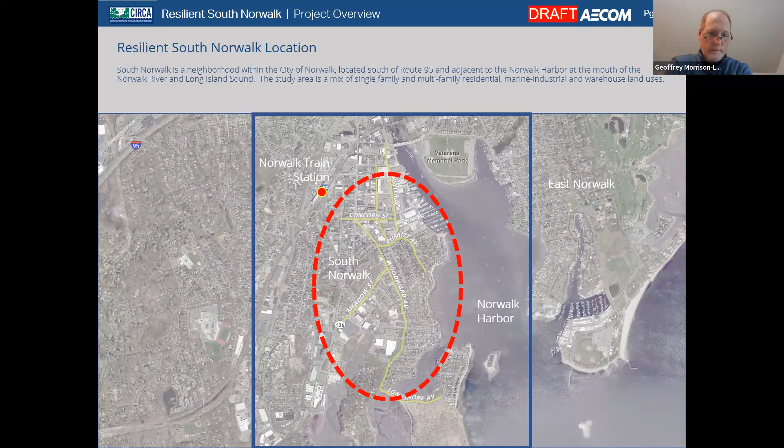In the project overview, this is one of 7 of the pilot projects for Circa, their efforts in Fairfield and New Haven counties. South Norwalk was one, and when they looked at this as a pilot project, the 2 issues that were more prominent were the flooding in this area, near Concord Street and Day Street down to Woodward Avenue, and heat.

We are looking at the project resilient design. We're really looking at resilient corridors in this particular project, but certainly other aspects of the process of analyzing resilient design are looking at community development, promoting healthy ecosystems, developing energy, economic, and social resilience, and of course, promoting flood and heat resilient infrastructure. And again, the main focus for this project was the resilient corridors.

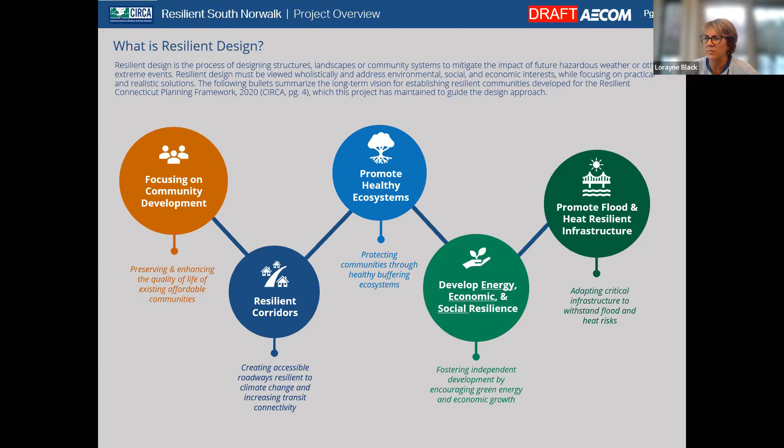And this is just a reminder that the main goal for this project was to develop a resilient corridor for the present and for the future community of South Norwalk, so that with this connection, the homes and the businesses are able to connect from the upland areas for emergency services in excessive heat, and also storm events that are currently occurring, and also in the projected conditions in 2050 with sea level rise.

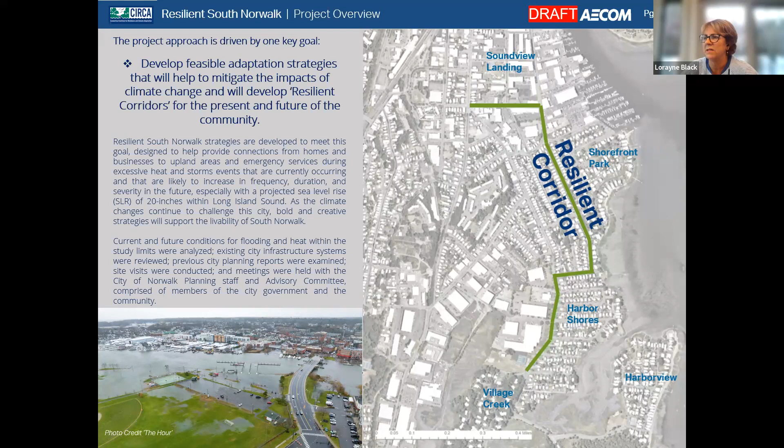In January, we presented the introduction to the project, and then in June, we presented some of our information about adaptation options, including the introduction of the Resilient Toolkit, and started to get feedback from the public and from everyone about what kind of priorities within that toolkit we should be looking at for the next phases.

Things that came up during pretty much all 3 of the workshops: concerns about flooding, of course, on Water Street and Woodward Avenue. People mentioned concerns about hazardous materials within the flood zones. The lack of street trees was mentioned a number of times. Increased density and development pressures, signage for education about flood events, and increased truck and vehicular traffic along Woodward Ave and Meadow Street.

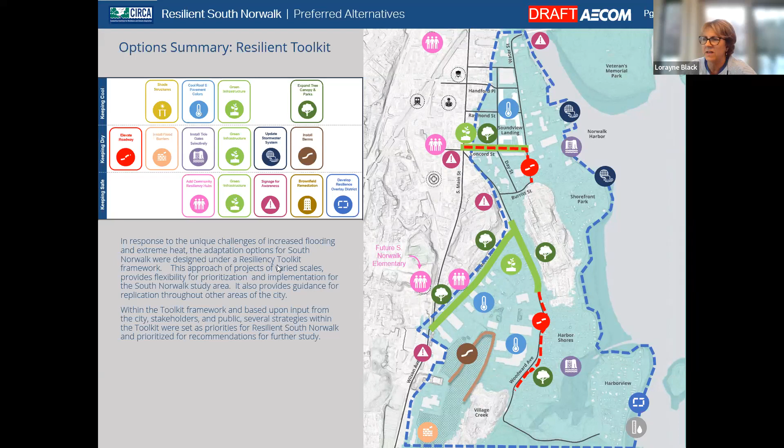And from lots of comments, we focused on 2 locations within the study area to consider elevated roadways. We looked at preliminary design for elevating Concord Street and Water Street to the Burritt Avenue intersection to an elevation of 9.5. And also a section of Woodward Avenue to the south that would connect at Sable Street all the way up to Lowndes Avenue, again at the same elevation of 9.5, based on the 10-year storm projected for 2050 with a sea level rise of 9.59.

So this was the limit that we felt would be a good elevation to have a continuous resilient corridor that would be just above the level of the extreme flooding in 2050. These are some renderings showing before and after.

Nick, do you have a quick question? Oh, I do. I can hold it to the end if you want. I'm not sure, I forgot if you want us to hold on to the end for questions. I don't know if we said. I would jump in, Nicholas.

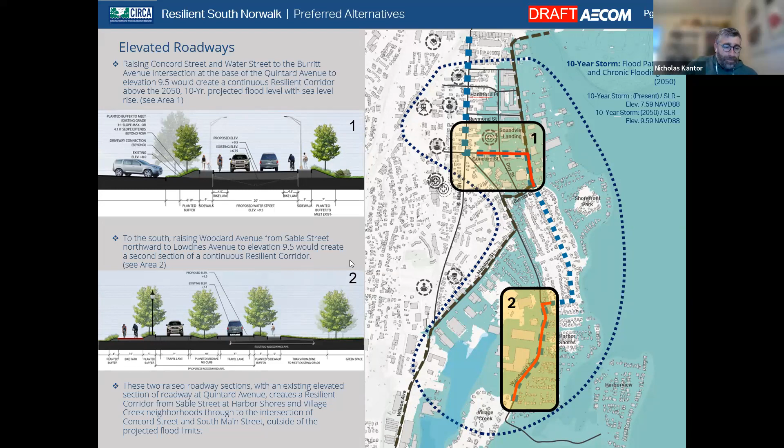So again, these are the renderings that I think you have already seen, but this is the before. This is Concord Street looking east, showing the mitigation of an elevated roadway, opportunities for green infrastructure, increasing the urban canopy, and making this a resilient corridor, not only for flood, to make that connection to South Main Street, Water Street and the Burritt, but also to make it a more pleasant and cooler pathway for pedestrians between the marine area, the housing area, the uplands and into downtown.

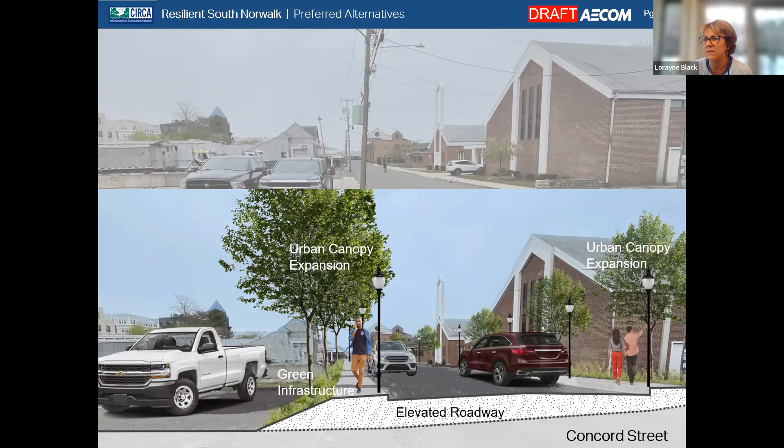The second was Woodward Avenue. Again, this is a photo from a previous storm and some of the flooding. You can see this is a similar location looking south on Woodward Avenue. Again, expanding the urban canopy, shifting the roadway so there is an opportunity for green infrastructure and a green buffer, and for grading between the single family homes and this new proposed roadway.

We made this more like a boulevard with a median, so that we'd have more opportunities for green infrastructure in the median itself. And it also had the expanded opportunity to locate a bike and pedestrian pathway that would connect to the public park just south of here, the Village Creek Public Park, and to some of the residential areas in the center on Lowndes Ave and further north.

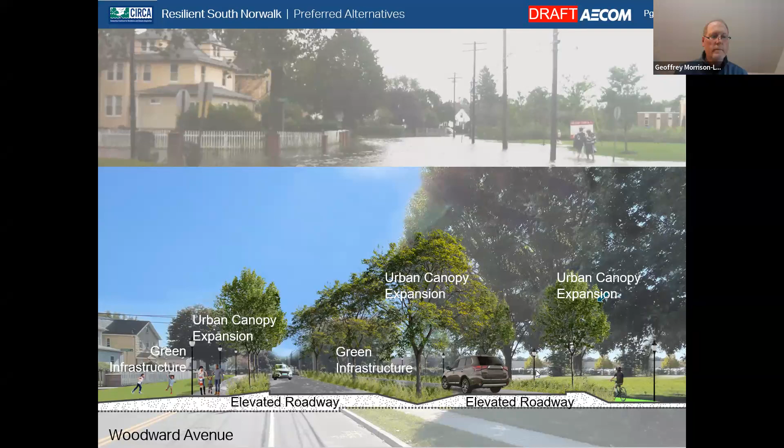So, just in summary of the executive summary, we looked at a lot of these different actions. We've put together a list of what we would recommend for the next step action items. Everything needs to have further study. These are guidelines and this is a planning level.

We've got a number of things here that we listened and heard a lot of comment from, and we've listed elevating the roadways for maintaining, again, that vehicular and emergency connection within the study area and having that safe, clear out-of-flood connection corridor.

Another step that we would recommend the city consider is looking at flood modeling to update the stormwater system, and maybe the possibility of tide gates, to look at the pipe system for backups, some evidence of possible backups for flooding in the upland areas, and also look at the outfalls with sea level rise. Certainly the elevation of the outfalls may need to be analyzed.

Incorporating green infrastructure in the corridor and other locations to manage the stormwater through things like permeable paving, maybe stormwater planters, and the possibility of some curb extensions, which gives you more opportunity for stormwater, bioretention swales, etc.

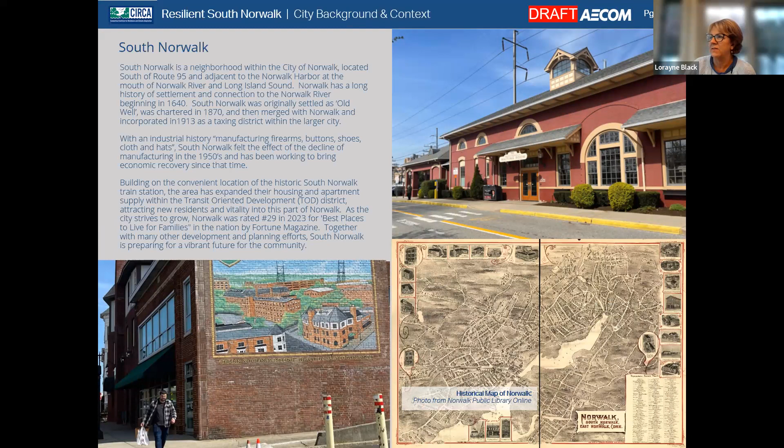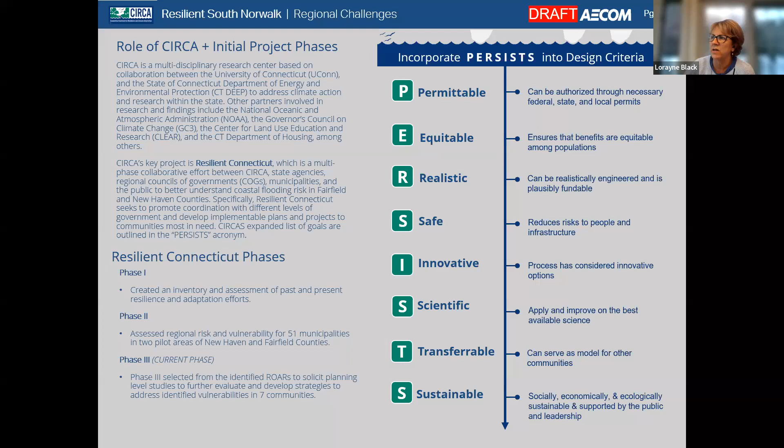So I'll just go through quickly: background and context, the history and background of this area and South Norwalk, a summary of the issues we're looking at in South Norwalk today, and the climate challenges. We also did a summary of the role of Circa and how this particular project and location was selected by the Circa program.

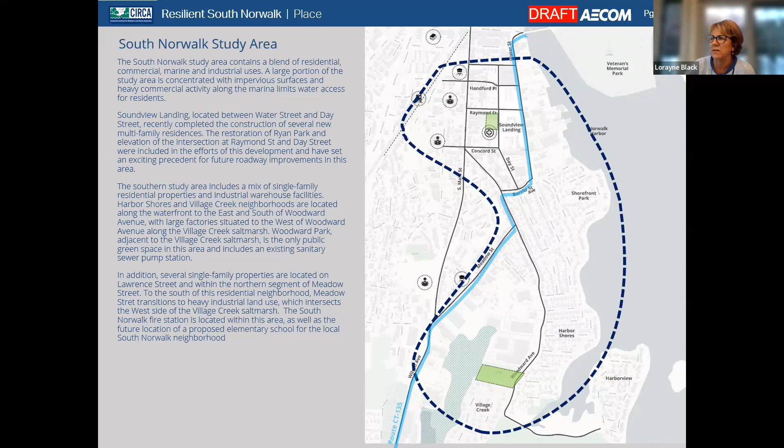Now we go into a little bit more of understanding the place, getting closer, instead of looking at it broadly, let's get down and look into the project limits and the details. We did a number of visual assessments looking at the existing conditions.

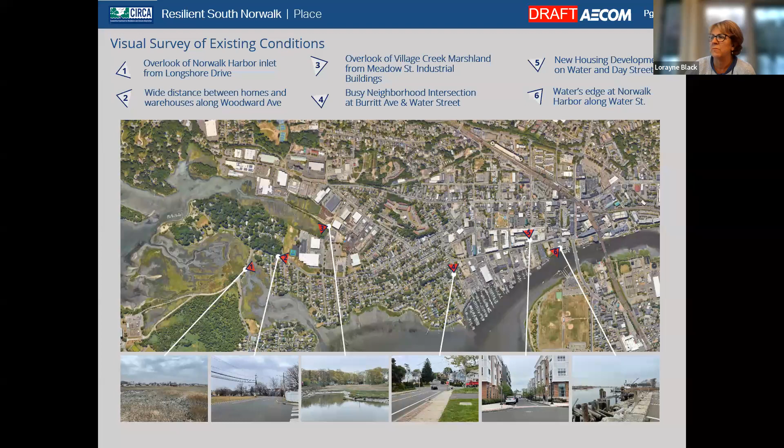Spent time on a number of days on the site. We looked at the area as far as community connectivity and the idea of how long it takes to walk from one point to the park, and from the train to the Burritt intersection, to get a sense of scale and connections.

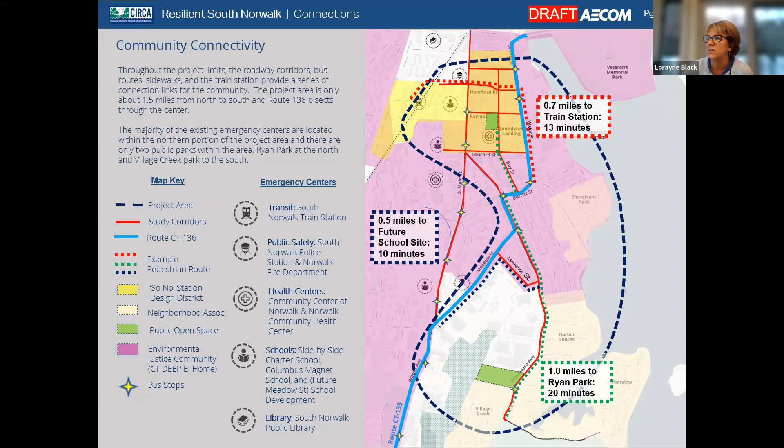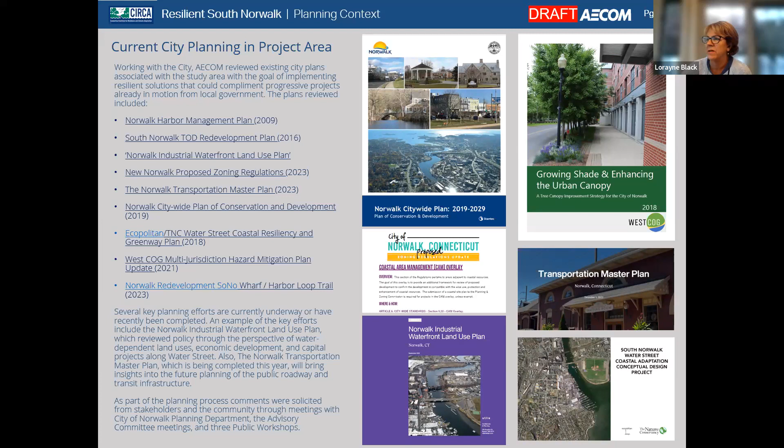Support about the city's program for walking and encouraging walking. And as we all know, there's quite a bit going on, a lot of projects. We've taken a look at all the projects happening during the study time, and become familiar with other planning endeavors occurring in Norwalk.

The zoning map was really key because it becomes very clear that you have the industrial and residential mix, and then the small section for marine commercial.

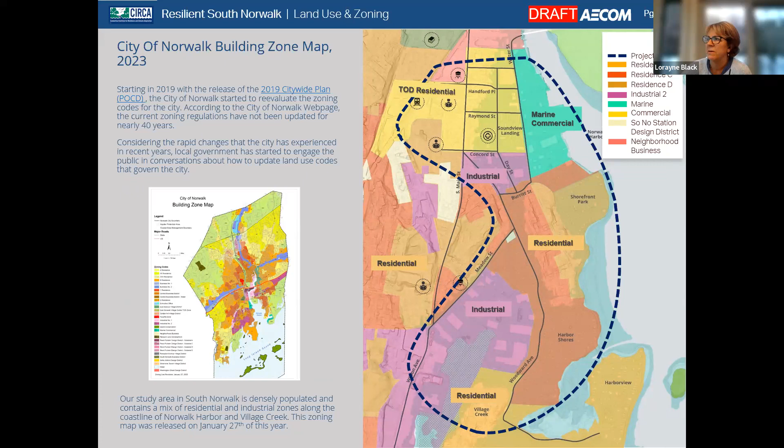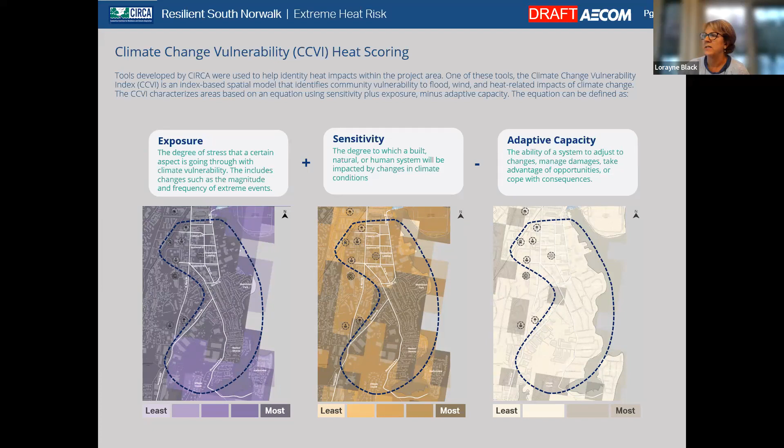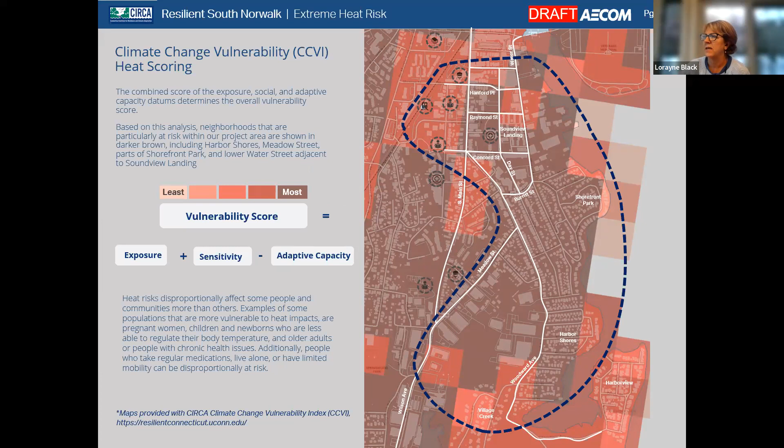And then we looked at the current and future conditions, specifically for heat and then for flooding. So we looked at the heat locations for exposure and sensitivity, and looked at what the vulnerability score was to see the areas of more concern, to key in again on the locations we want to focus on.

We looked at larger areas of impervious surfaces that were clear from a lot of the aerial imagery and analysis that we did.

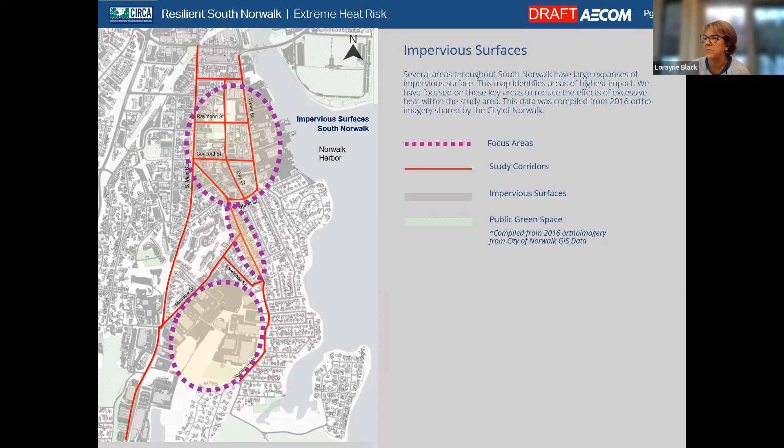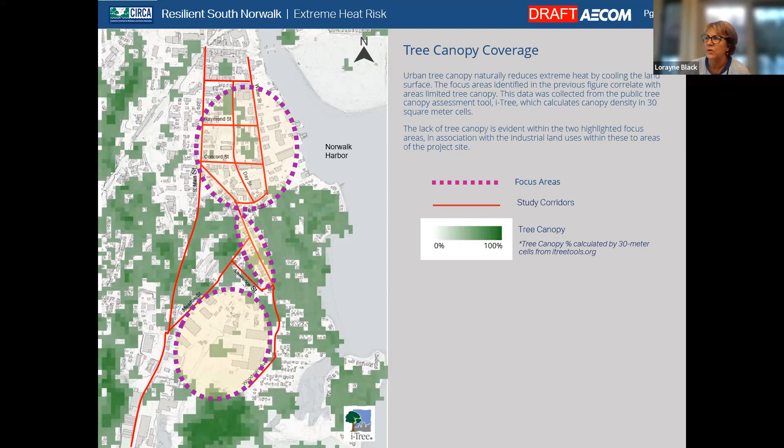It doesn't take much to also look at the fact that that overlaps with the lack of tree canopy. So many times those overlap, which started to give us some information about where we should look more closely.

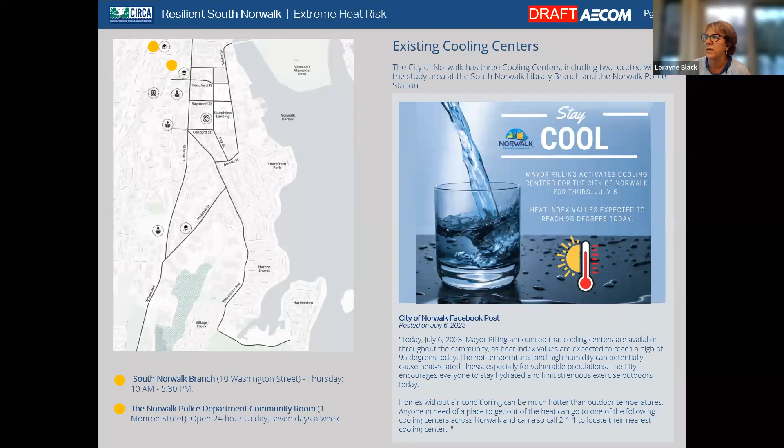We also included some of the cooling center locations and what the city is doing right now and what they have for facilities. Moving on to flooding, the three sources are stormwater, extreme rainfall, and tidal waters and storm surge.

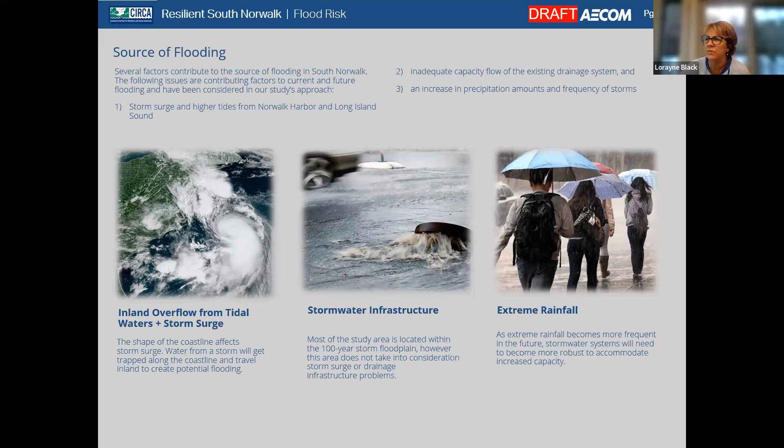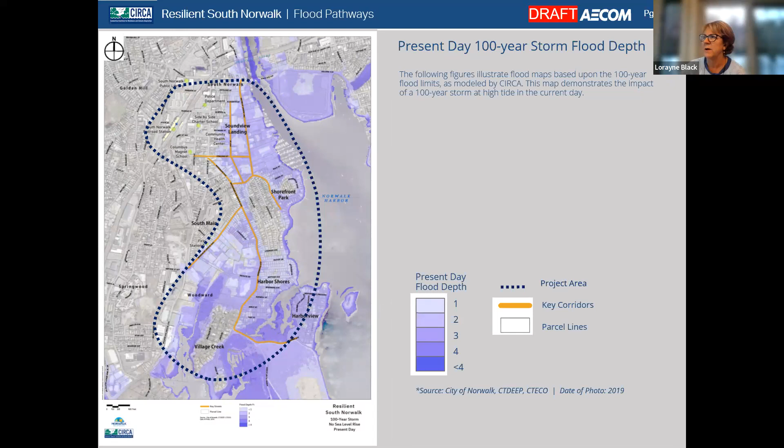We looked at the 100-year storm depth for current conditions, which started to give us some idea about flood pathways. We also looked at the 100-year storm depth for the projected future, 2050.

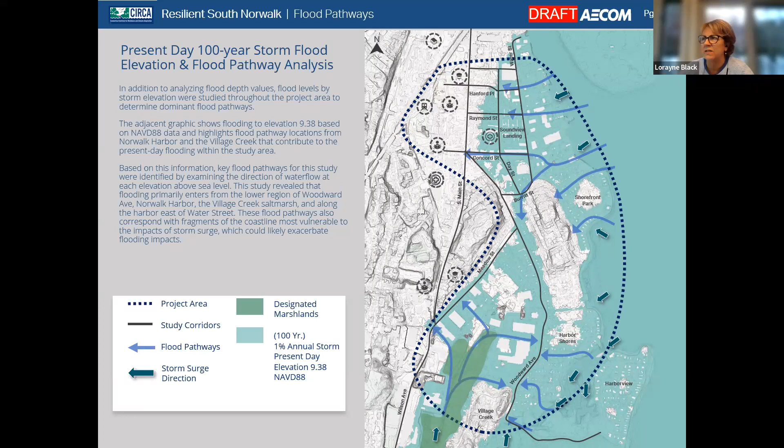We then took that information and used elevation data so we could really get a sense of where the flood pathways were for the existing 100-year storm, as well as the projected 2050 100-year storm, allowing us to understand where the sources were for overland flow from the harbor and Long Island Sound.

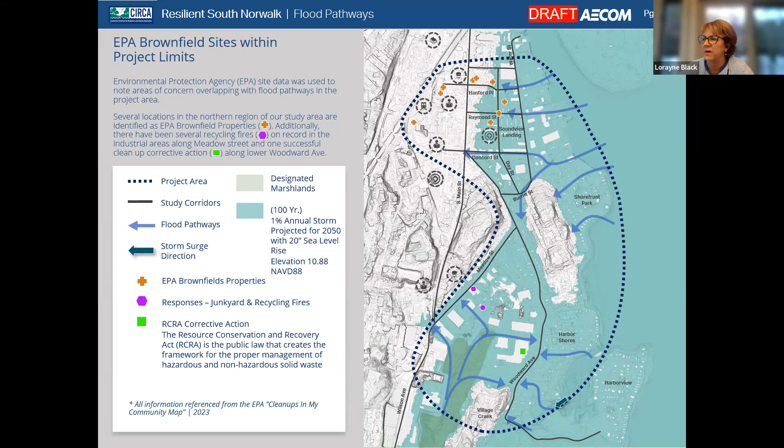We took a look at the brownfield sites, the EPA's brownfield sites from the public information, so we get a sense of these areas we need to be aware of when doing the study.

We also did an analysis of the existing pipe system, the existing stormwater system, to pinpoint areas where larger pipes are going into smaller pipes before the outfall. That informs the city that they might want to take a look at the whole system with the DPW, maybe sooner than later.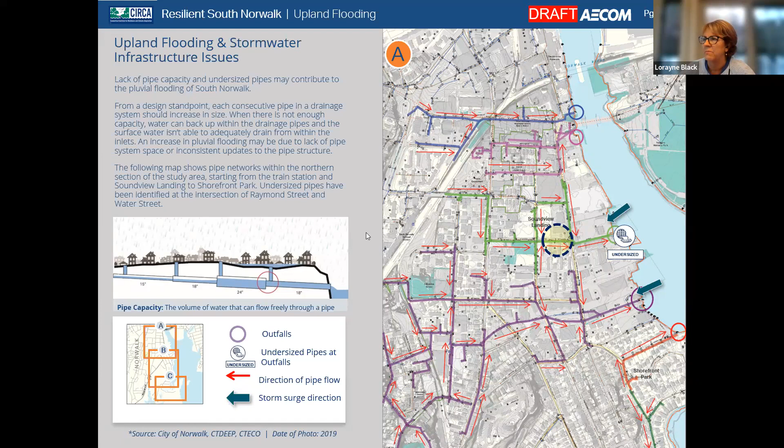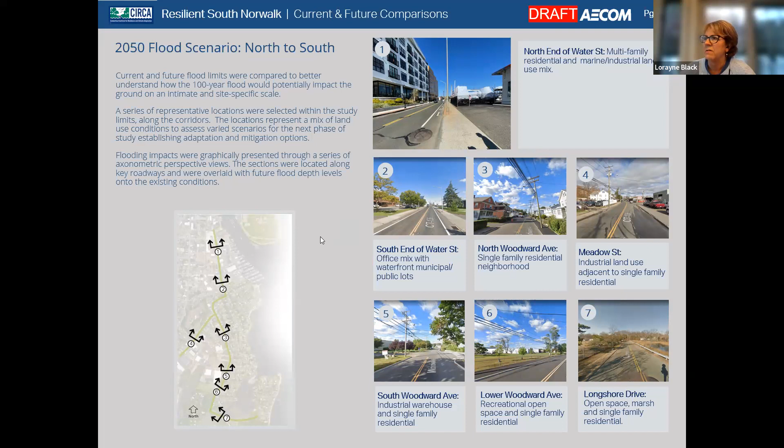We did that for all three of these sections, going through from north to south and looking at the depths of flooding. I'll go through these pretty quickly.

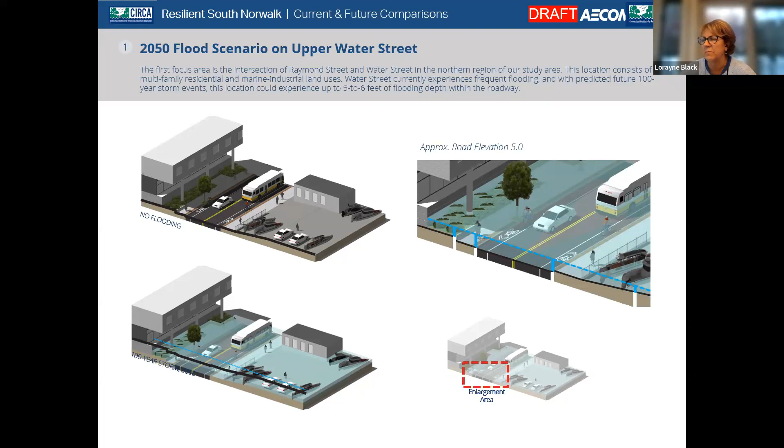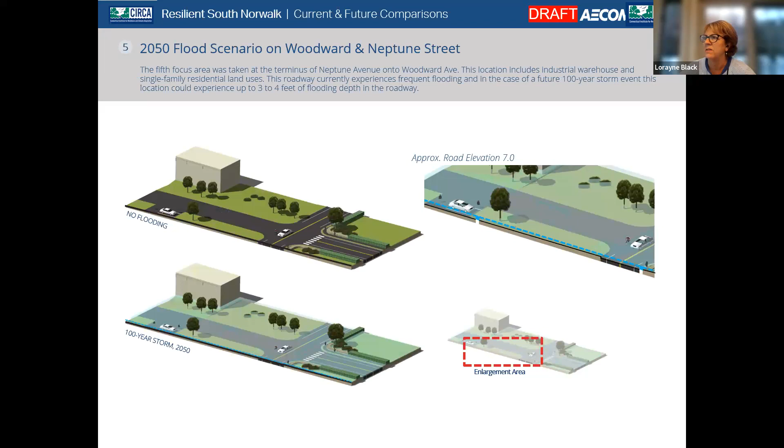This visual was really helpful, I think, for the public - a graphic showing how a change in road elevation would relate to flood elevation in different locations, for existing road elevations and what it would be for a 2050 flood scenario.

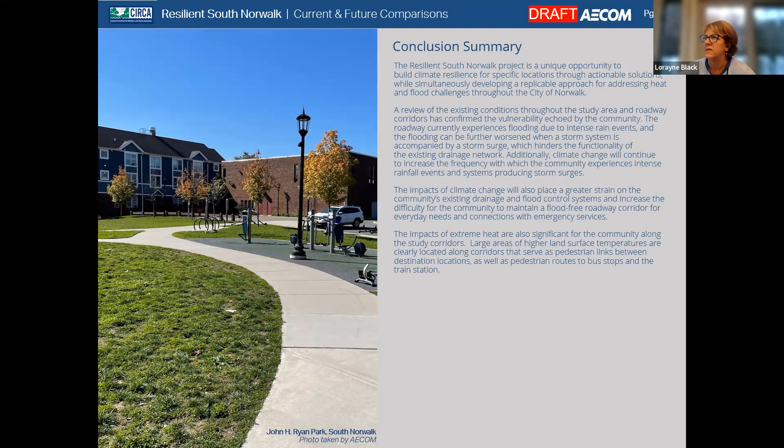Then just a summary of the current and future conditions, and we start to get into the adaptation options.

This is what we had talked about earlier regarding the resiliency kit of parts. We looked at a whole series of different mitigation options, ranging from much more structural to non-structural, organized based on strategies that would keep you cool, keep it dry, and keep it safe. So we divided those to understand them better.

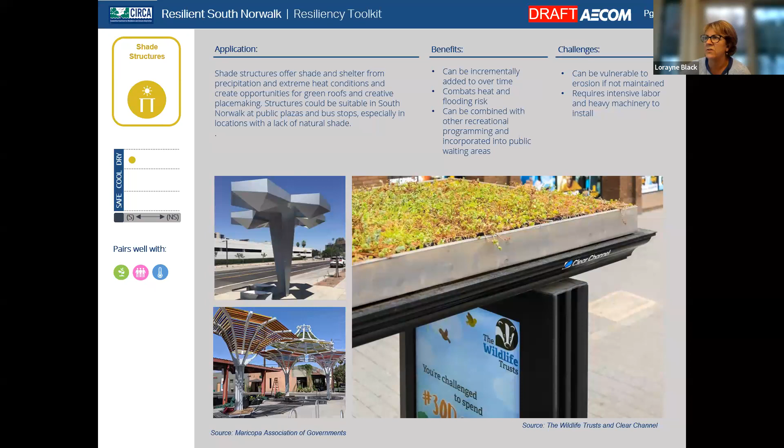Each of these go into a little more detail about the pieces of the toolkit, stating what the application would be, some of the benefits, and some of the challenges of using these types of strategies.

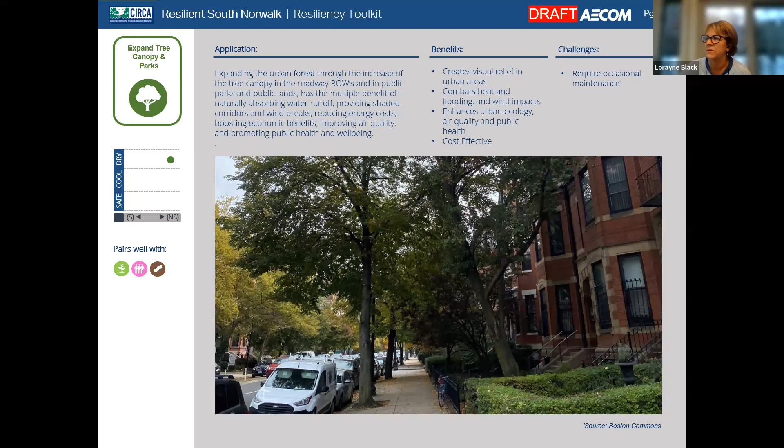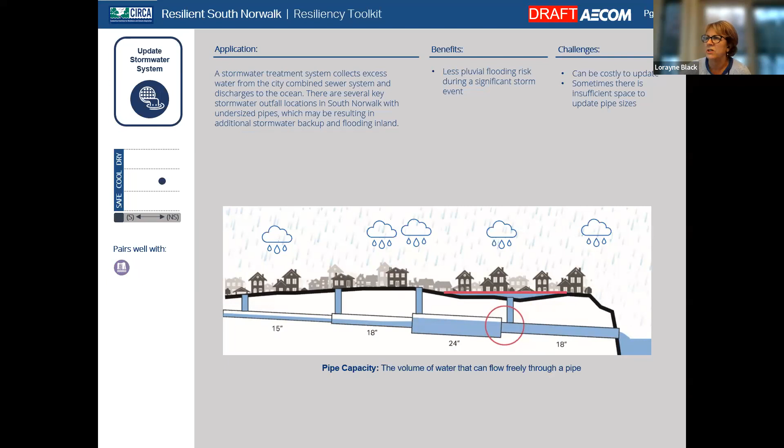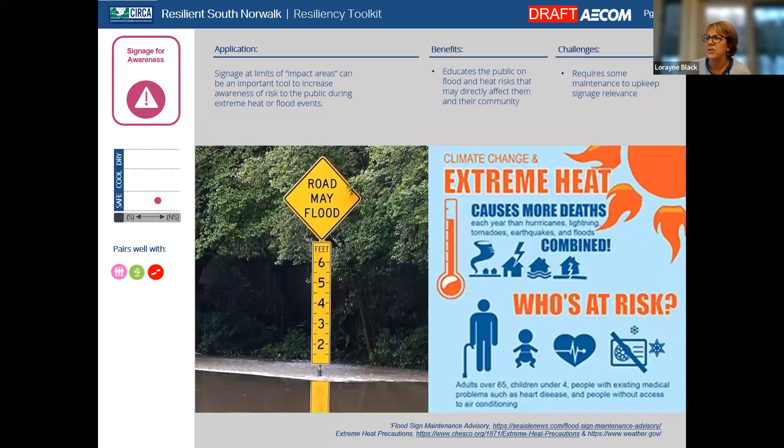This includes flood barriers, tide gates, stormwater systems which we mentioned, some of the berms we talked about earlier, community resiliency hubs, signage at the limits of the flood areas, and looking at brownfield remediation sites.

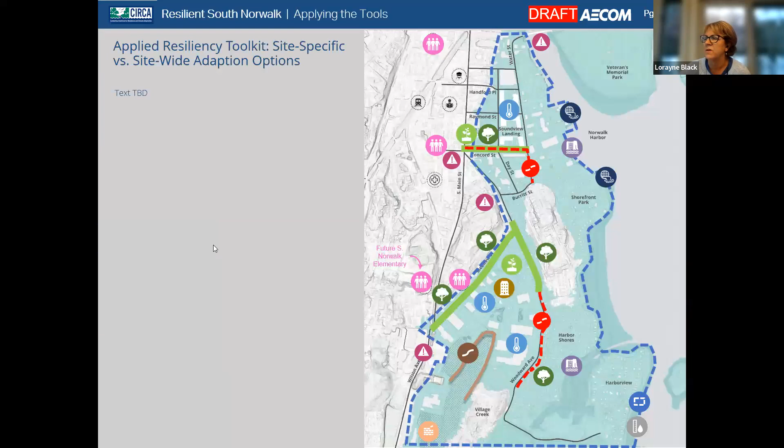We looked at the whole project area and designated where we were recommending each one of those toolkit types to be incorporated and used. As I mentioned, this certainly could be replicated into other parts of the city.

In this next set of slides, we have the 10-year storm, present day. We've seen these figures quite a bit - we had previously looked at a 100-year storm, and we made a decision for the preferred analysis to look at a more higher frequency storm, so we looked at the 10-year storm instead.

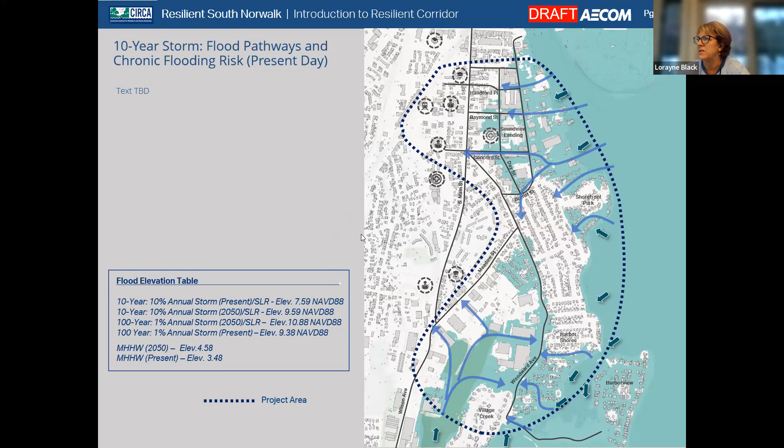This map shows what the 10-year storm would be present day, with the inundation shown in blue. Again, this helps us understand the flood pathways and how they change when projected for 2050, between present day and the projected future with sea level rise and elevation change from 7.59 in present day to 9.59 in 2050.

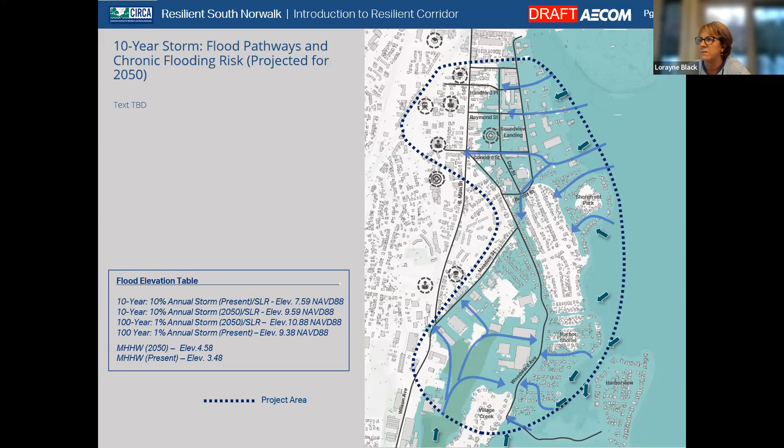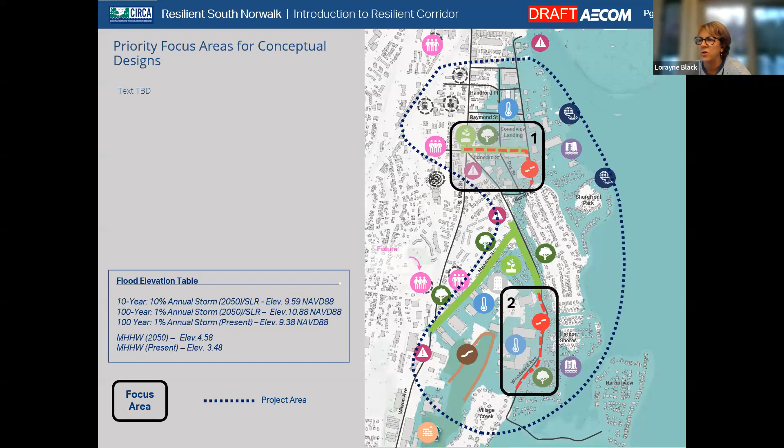So as we started to look at all these different toolkit options, we started to realize that there might be opportunities to form a connection with some elevated roadways. We knew these were critical. We looked at locations with fewer single-family homes, knowing that elevating the roadway would be much more difficult at smaller lots with single-family homes than at larger open parking lots or open spaces. We started to do that analysis.

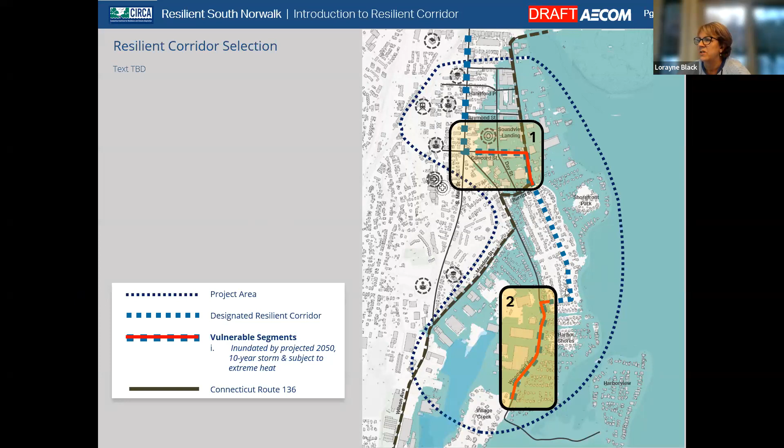Then we tried connecting these two locations versus going straight up through Woodward, in order to make these sections shorter for lots of reasons, financial and disturbance. The idea would be to connect the northern section with the southern section by going through the hillside on Quintard Avenue.

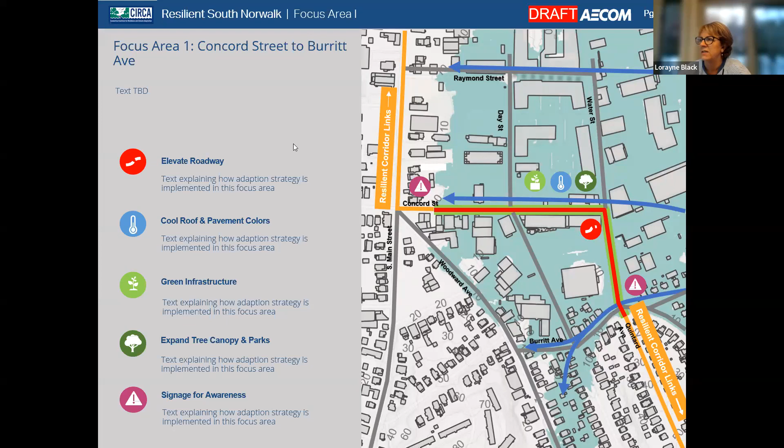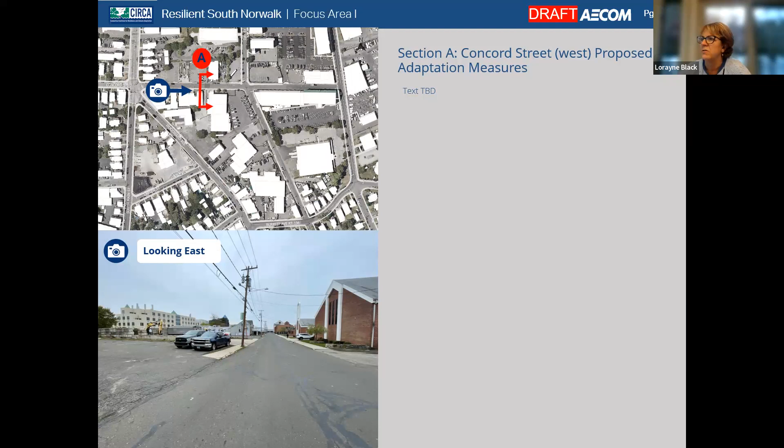This goes into more detail about the Concord Street to Burritt intersection and some of the toolkit applications that could be used. Then we got more detailed and looked at sections, comparing existing current conditions with a proposed section showing an elevation change from approximately elevation 7 of existing up to 9.5, if we wanted to design for the 10-year storm, the projected 10-year storm elevation, to be out of the flood.

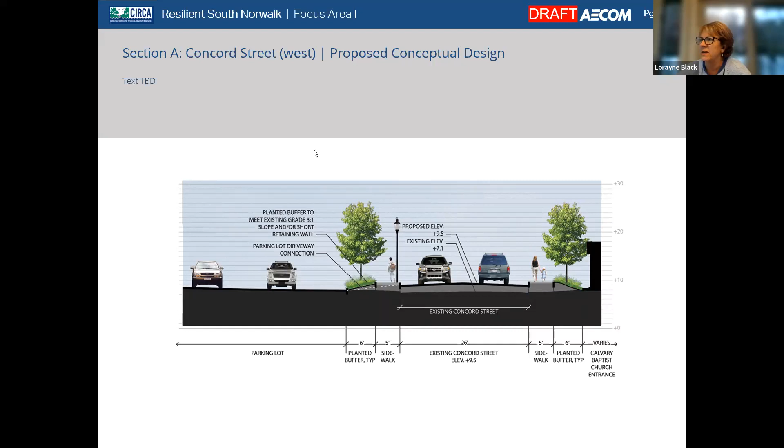This is at Concord Street, at the west end of Concord Street in South Main. We're showing a little bit of area of transition that we would have to make, from the 9.5 down to existing elevation. This is quite rough, but it's approximately a 3% slope, so it would be a gradual slope up to the elevated roadway and then back down.

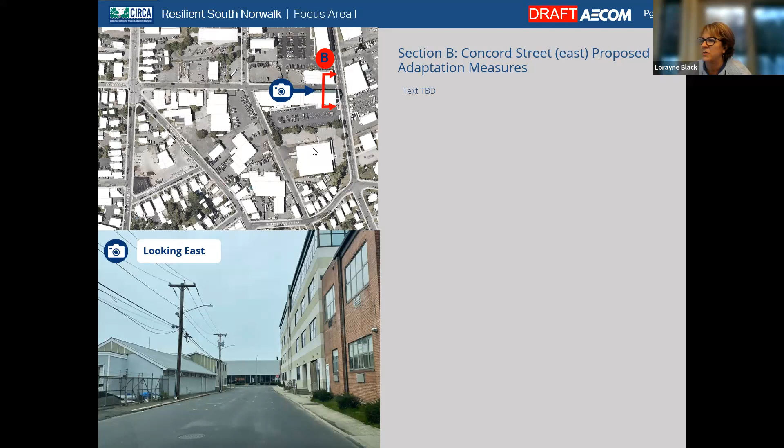The second section that we looked at was a more challenging one. This is at the eastern end of Concord Street between the buildings, where it's more narrow. This is the existing section, the existing current conditions. And we looked at the elevation.

We looked at a couple of different options, and this particular one was looking at changing the direction of traffic flow to be one-way, coming from Water Street towards Day Street, allowing a little more area on the side to transition. This would need some retaining walls, etc., but it gives a little more space within the travel lane. We also looked at a two-way option, and as you can see the difference, you get more opportunity to have more buffer on the sides if the roadway is more narrow.

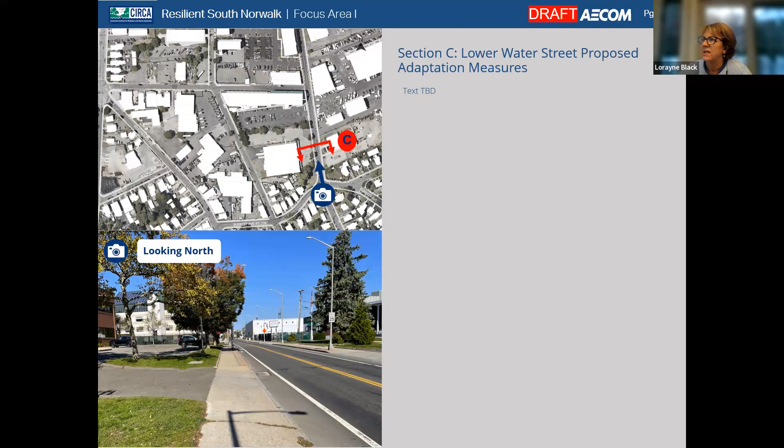Then section C is at Lower Water Street, just about at the Burritt intersection. The current condition is shown here, about elevation 6.75, and the proposed elevation. In this particular section between Concord Street and Burritt, it's quite wide, with open space and some parking lots versus having buildings right up to the edge of the roadway. So it was an opportunity, and it was a short section.

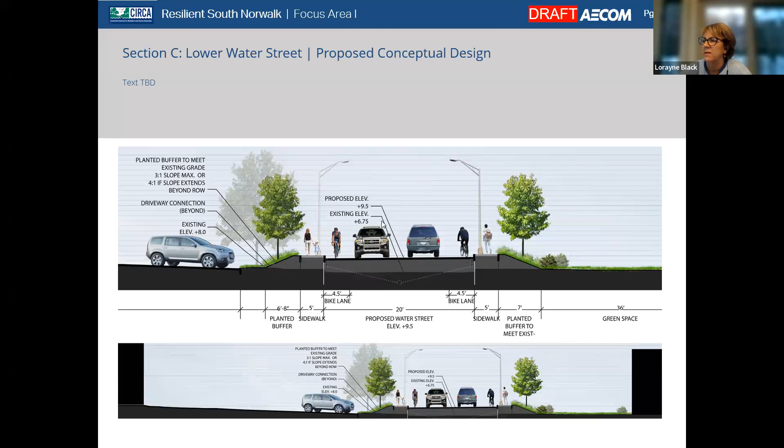Being able to do that here gives you a chance to use a 3-to-1 slope or a 4-to-1 slope to extend outside the right of way. Here's section C. We wanted to show the existing condition and a proposed illustrative rendering of how that would be changed, with the raised road, a sidewalk, more street trees, and possibilities of incorporating green infrastructure.

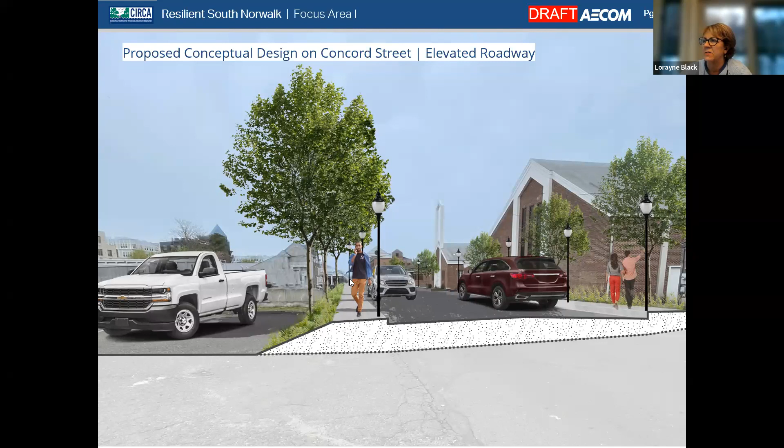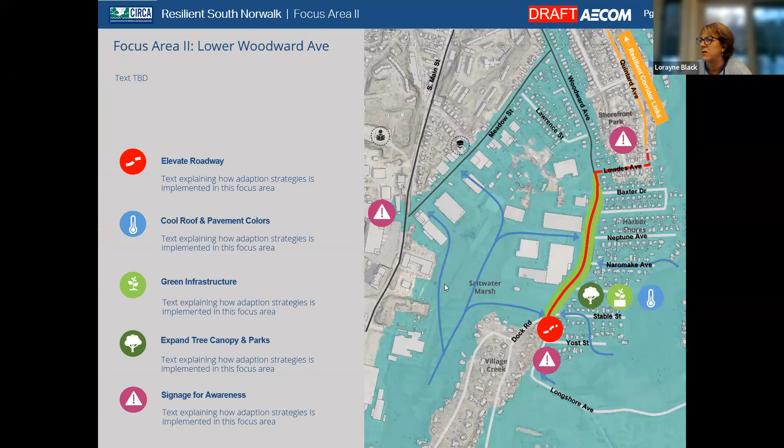Then shifting to focus area 2, which is down on Woodward, we did the same sort of analysis, the same thing we just talked about. We looked at other mitigation toolkit locations where those could be incorporated, and we put together two representative sections, D and E.

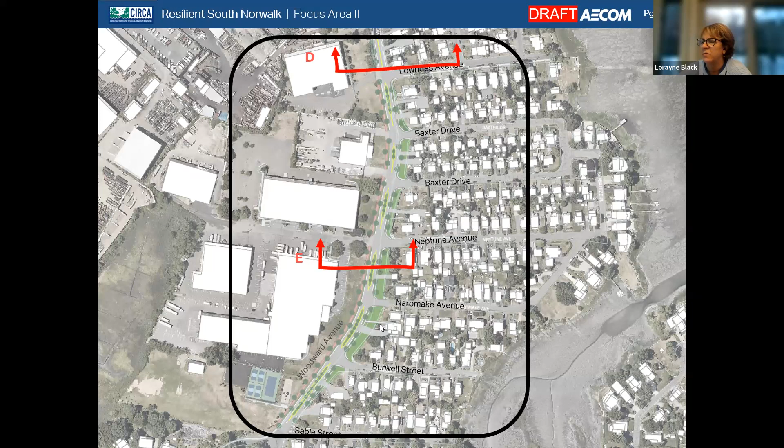Section D is at Lowndes Avenue, where we transition from the existing elevation into this elevated roadway system, and just south, between Neptune and Naromake, right in this location. As you can see from the plan, the road is shifted to the west. It's a boulevard design, with green space on the east side as a buffer and an opportunity for grading between the single-family homes and the new roadway.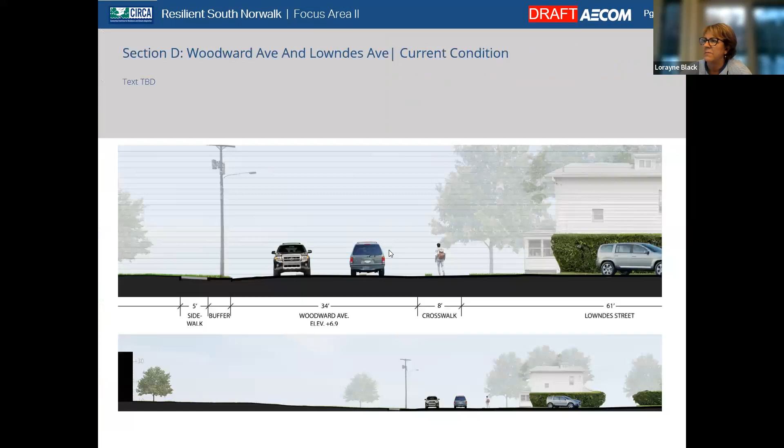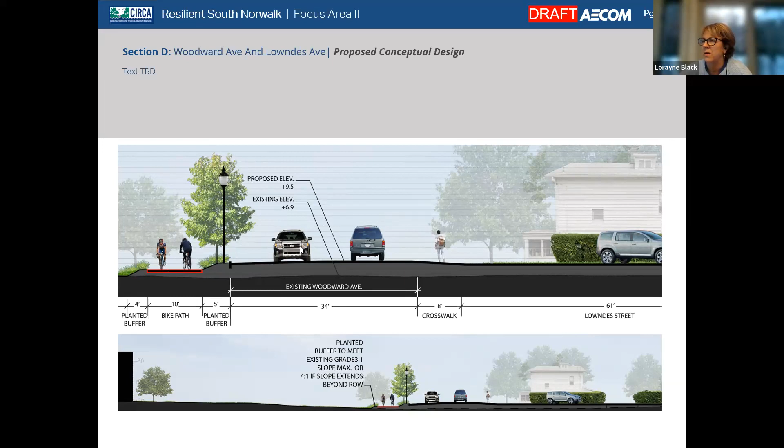So at section D, at Woodward Ave and Lowndes Ave, this is the existing layout, and the proposed layout starts to show the incorporation of a shared use path, or a bike path, 10 feet wide, on the west side of the roadway. As I mentioned earlier, it seemed like a great opportunity to have connectivity between the densely residential area along Woodward and Lowndes, and that neighborhood, down to the public park, taking advantage of that if you're going to make these changes.

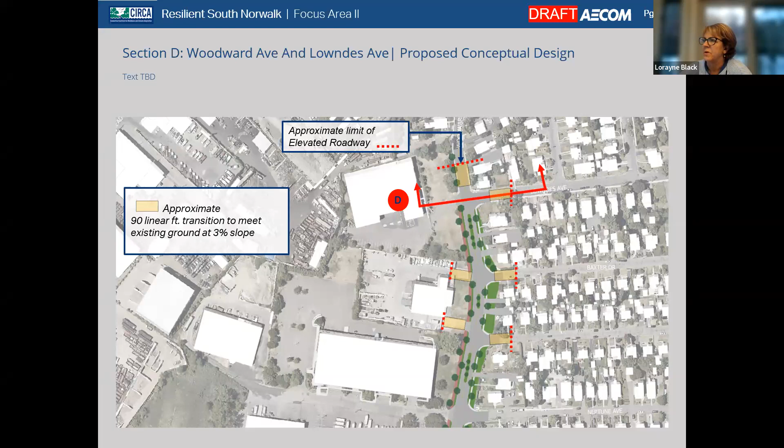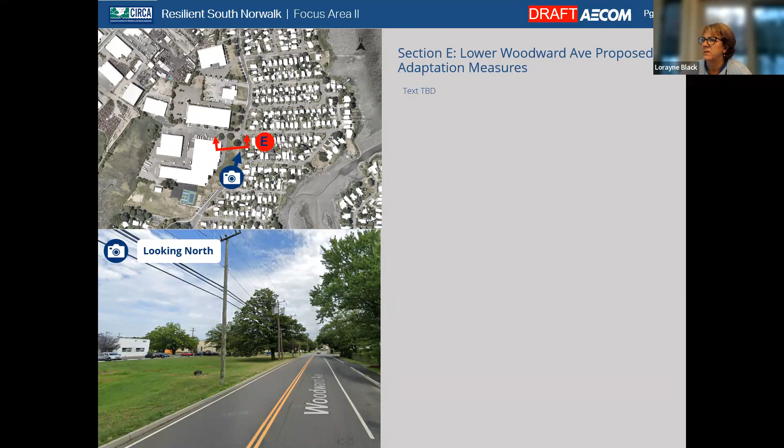We looked at some of those 3% slope transitions. The last section is at Lower Woodward down closer to Neptune. This is a quite wide section, and it gives you a sense of where the buildings are, the warehouses on the west side and the homes on the east. You can see that it's quite a wide stance.

And this would be the change. We'd have the median, the planted median in the center that could also become a bioswale, one lane north, one lane south, transition, a 5-foot buffer on both sides that would also be planted, but it would also allow you the opportunity to grade, to start to transition back to existing elevations.

And sidewalk on the east side, there's a sidewalk now, that's the residential side, and then the bike path on the west side, which would be further away from the homes, but it'd be on the warehouse side.

And then this whole area has an opportunity again to be used to control stormwater. In a non-storm event, it's green space, open space, and if designed in a certain way, it can be an amenity for the neighborhoods, but also in a storm event, if designed, it can be an area for collecting stormwater.

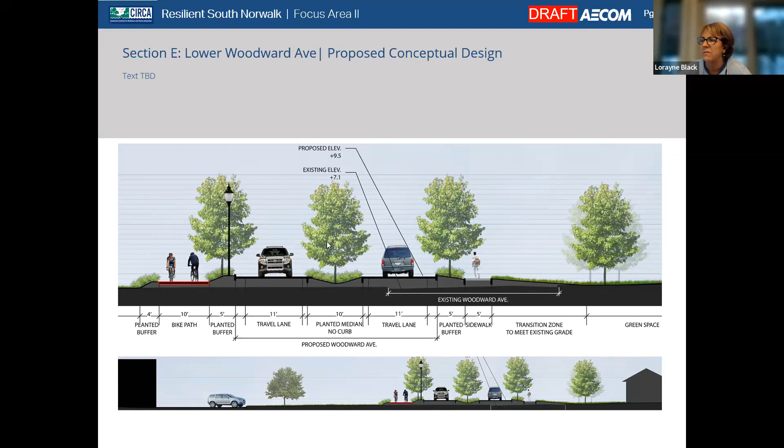Here's the plan. This is the existing view. And this is the illustrative rendering, showing the changes from one to the next.

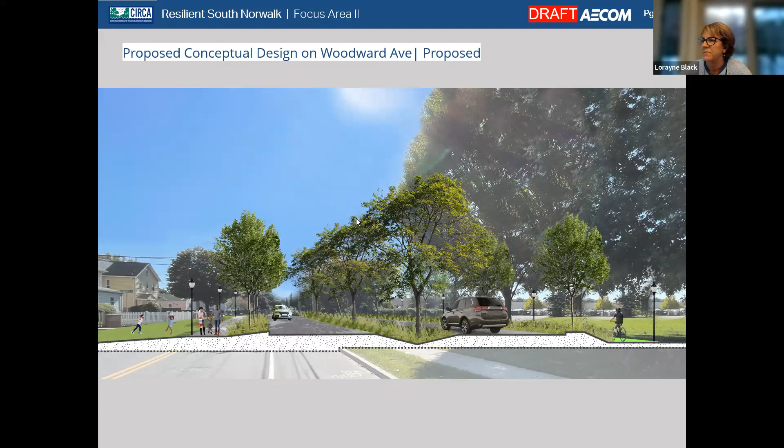This next set of slides addresses looking at the 10-year storm at present day, and we did a very preliminary conceptual modeling of how it would impact flood patterns if Concord Street and Woodward Ave were elevated. What we looked at was the present day condition for the 10-year storm.

With those roads elevated, it does serve as a bit of a block for some of that flood pathway zone. In purple, you can see areas that, based on the modeling we did, appear to flood at the 7.59 elevation. But with the change in elevation on Woodward and Concord Street, this area may no longer flood—it might block that.

Same thing here. This is if it flooded up to a 9.59 elevation for the projected 2050 10-year storm. You can see that at that higher elevation, it impacts even more by blocking some of that overland flood pathway that comes across Water Street into that neighborhood.

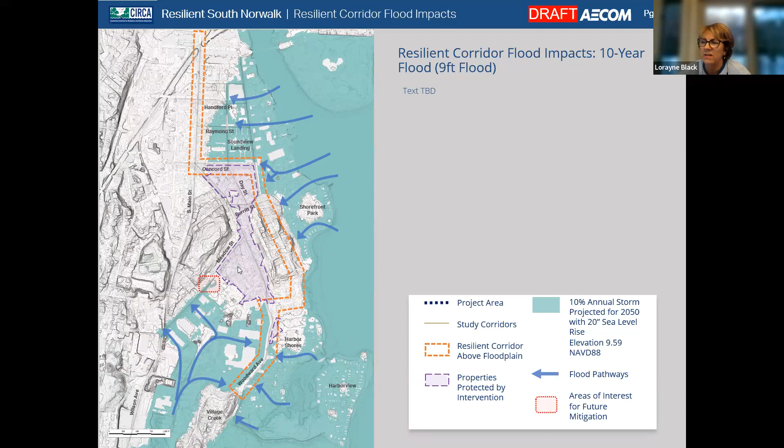We would recommend further study if the city decides to look into this—the idea of elevating along this edge of the flood zone on Meadow Street. If you do that, there's a connection at the northern part of Meadow Street that right now serves as a flood pathway right into this back neighborhood. Based on the elevations we've looked at, that might be another area for consideration at the next stage of analysis.

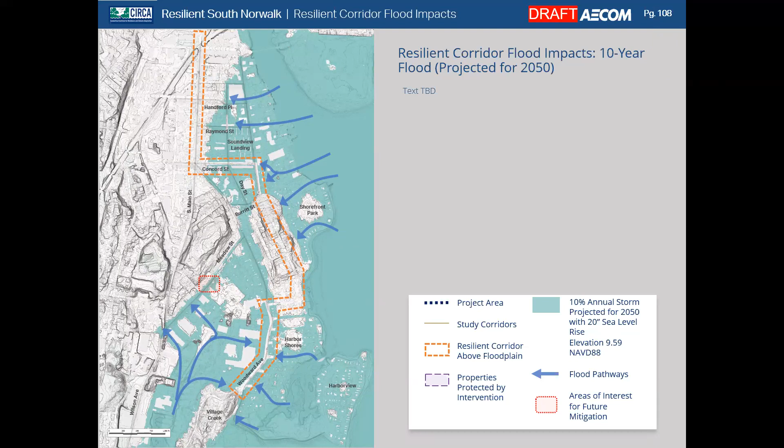Yeah, so this is all in the report. And we do have the benefit analysis in the back, and some of the cost analysis as well.

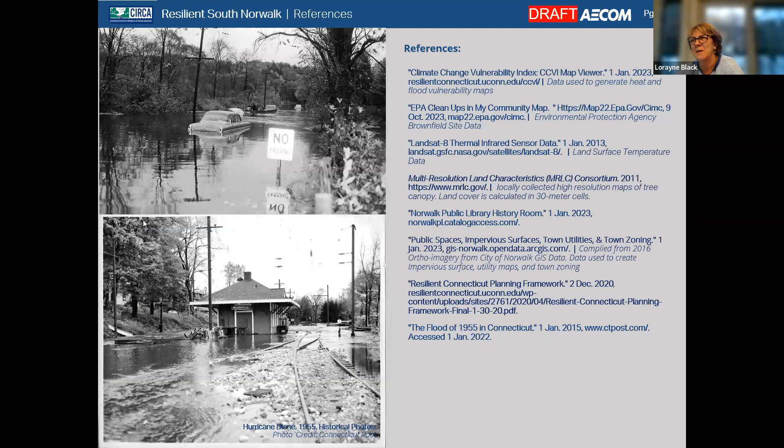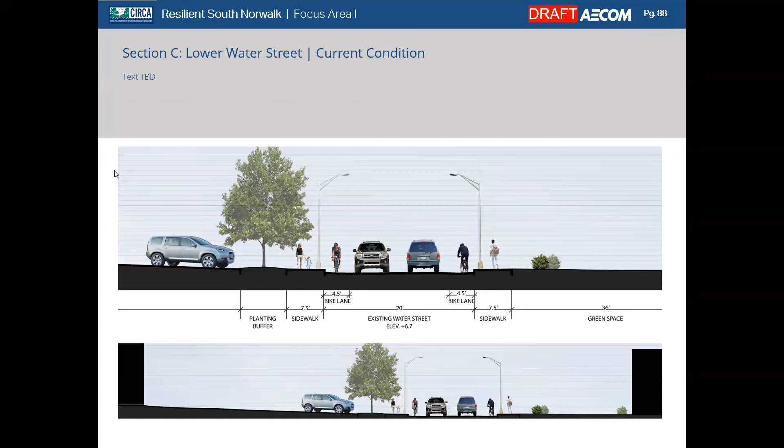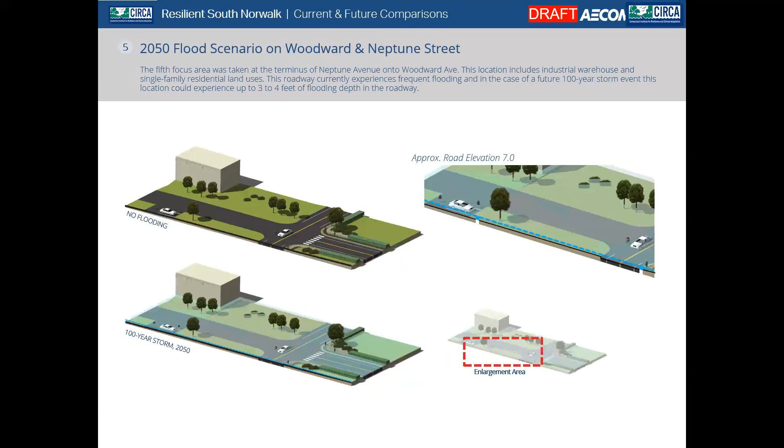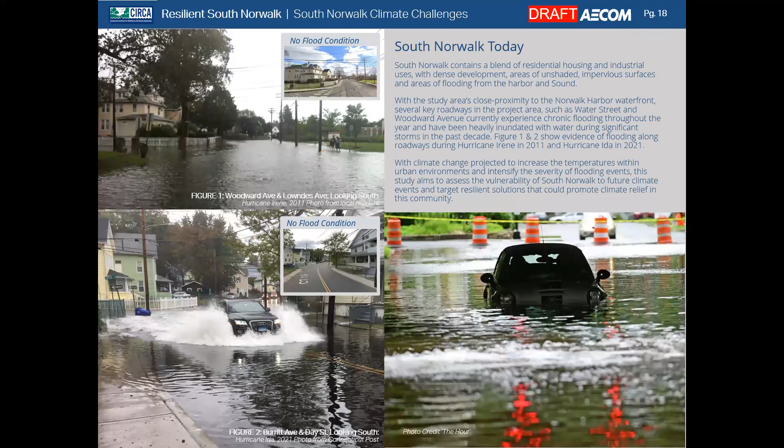So maybe in terms of where we are, congratulations to everyone that's been involved. As Lorayne, you started out with a lot of great work that's gone into the process, into the recommendations and some of the diagrams and things here as a roadmap. This is not where these projects end, it's hopefully where they start, with a lot of different pieces. And Stephen, thanks for sharing what could be next in terms of the city's pipeline. But maybe in terms of next steps, we're looking to get this wrapped up by the end of the month, send this off to Circa as well as to the city, use this as a playbook, as a toolkit, and all those great things.

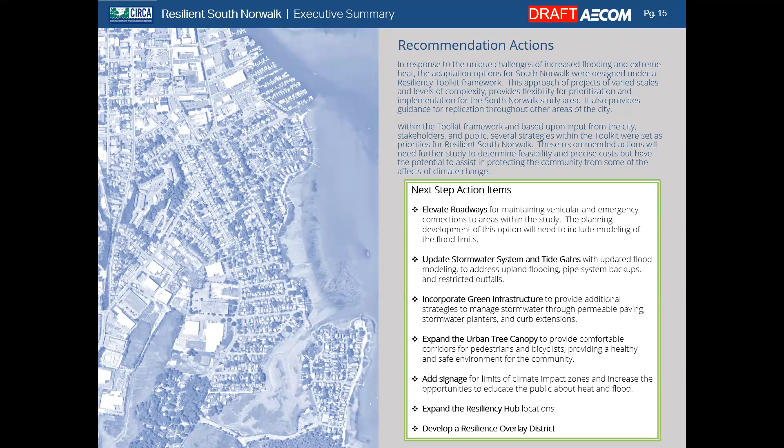But maybe it'd be good to hear from John just a little bit about next steps, and maybe from Michelle before we close out about where we can go from here. So maybe John, do you want to talk about what could be next and what this means in terms of having this report close to being done? Yeah, thanks, Jeffrey. Put me on the spot a little bit, but...

So yeah, we're trying to wrap up 7 of these studies as part of Resilient Connecticut over the next month or two, and then we have one full report that we have to deliver to our sponsor that provided the funding for this whole program.

And then I think we've started to have some follow-up conversations with Norwalk on a couple of the ideas, one of them being the idea of the overlay district. So we have some researchers at the UConn Law School that are looking into that and looking around for other precedents, and we'll provide some recommendations on what that could look like in Norwalk.

So that's ongoing. And then we've also started talking about the idea of a resilience hub or hubs through another proposal. Been talking with Michelle DeLuca about that.

And then I think, originally our goal with this was to help the city get some projects that were at a conceptual level with some cost estimates that could go after some of the federal funding that's out there, like BRIC and some of these other programs that have come through in the last couple of years. I think the comment about the DOT needing to be involved is a good one.

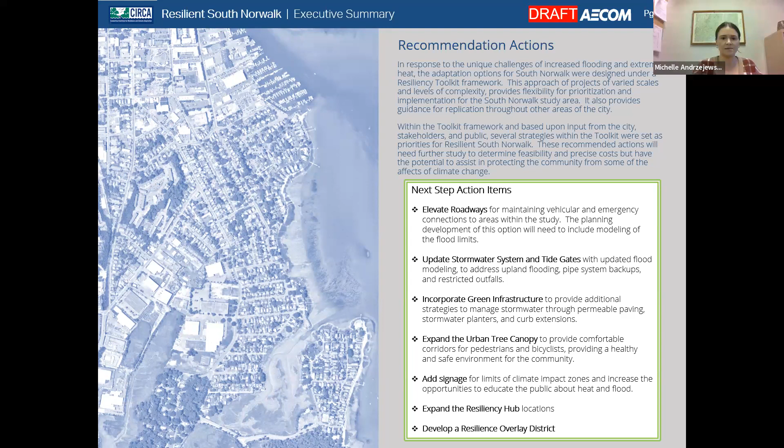And I don't know, Michelle, if you want to jump in with any next steps from P&Z or the city. Sure. So on the city side, next steps for us would, once we get the report in hand, distributing it, and then I think usually, Steve, correct me if I'm wrong, we'll amend the POCD eventually with this plan. Not sure if that...

I don't know if we need to with this one, just because there's not specific... we could, I'll have to take a look and see. There's like the resilience overlay, but I don't know if we need to amend the POCD to kind of justify doing that, regardless I think that's another initiative the city could just take on. But again, we can evaluate that.

Yeah, I think just in general, just cracking away at the recommendations and getting funding, and just want to thank Circa and AECOM for all their help. This has been a great process and learning experience.

Yeah, it's been great working with you all. Thanks to AECOM, you guys did a lot with limited funds, and it's really great. Yeah, I can second that. We got a lot out of a limited budget for this study, so really appreciate all the work, Lorayne and Jeffrey. Wow, it's been great, it's been a great project. I'll leave it there.